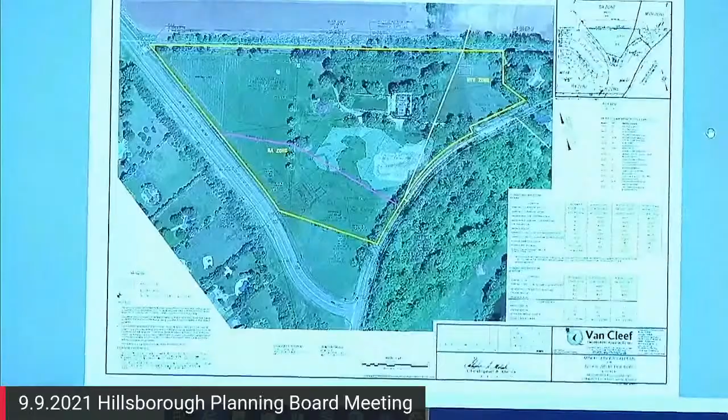Okay, sorry. So can you please briefly describe the project for the board before we get into all the reports? Yes, it's as introduced: a minor subdivision to create one new buildable lot in the remaining lands with the existing dwelling and other structures. This is at the intersection of Amsterdam Drive and Millstone River Road. I'm sure you may know it well, as I know it as the vineyard on Amsterdam and the beautiful white house on Millstone River Road.

Okay, so let's start talking about the variance requested for the project, and we can look at the planning memorandum dated August 16th, '21. Yes, and for the benefit of the board members and the public, on the video is the color rendering posted on the township website. It's a colorized version of the minor subdivision. The entire tract, which is 12.5 acres, is outlined in yellow, and in cyan is the proposed lot line, which would create the 2.5 acre buildable lot on the southern portion of the tract, and the remaining lands with the existing dwelling and other structures to the north. We're going to mark this A1. This is the minor subdivision plan, last revised July 14th, 2021.

With regards to the relief requested this evening, the application complies in all regards with the exception of the lot width for the proposed lot, which is the portion that fronts on Millstone River Road. With these types of lots that have frontage on two roads, they're commonly referred to as through lots.

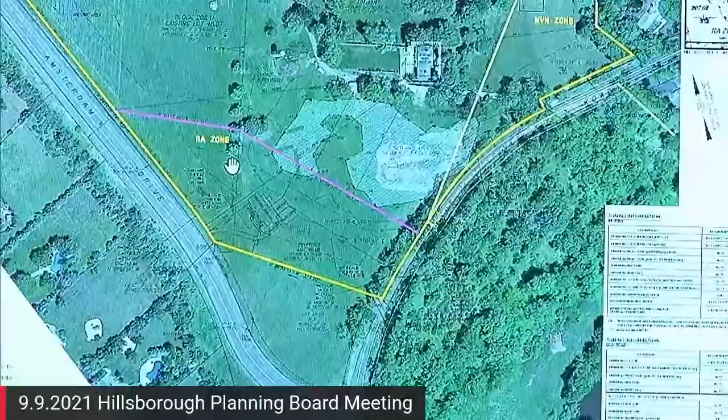The tree I'm referring to, this is likely not natural or native, it was planted. There's a row of trees along the edge of the grape vineyard and fence, and there's one tree in this location. We don't want to touch any of them, but to the extent we may need to for grading and drainage around the new dwelling, there'd be one tree. We've actually discussed this with the applicant. Okay, thank you.

You're welcome. Can I ask a follow-up question? So is the construction and development in the foraging area for the bald eagle? I think the foraging area they're referring to is really the rivers, the Millstone River and the Raritan River. Because I do have experience that if this does fall within that foraging area, there are restrictions on when you can disturb the area while they're nesting, a period from January to August. So it should just be looked into.

So is what Mr. Ford said all right with you then? Yeah, I know there's just time constraints if it's determined that it is in that foraging area. You're saying you don't know or it's not in that area? Well, we're talking about one tree that we'd be impacting. Oh, it's a tree. Yeah. And when they refer to foraging, it's my understanding they're foraging for food along the rivers. Okay, you all right with that? Yeah, okay, thanks.

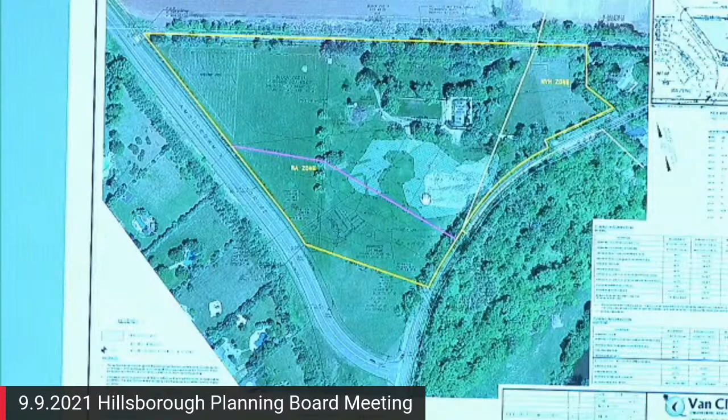Yeah, and then with regards to widening this out, widening it another 20 feet or so really wouldn't enhance the buildable area of where the house is being placed, and really just brings more restricted area. This is where the wetlands are that I'm highlighting now onto the rear of this lot. So there's really, and because that's a technical requirement for lot frontage—yes, that's true, this is our lot frontage, but this unique situation where it's a through lot, that's really our rear yard.

So what leg on that requires the variance? This leg right here, along Millstone River Road. So if you were to move that to make it conforming to 200 feet, does it then hit that other zone? And are there implications of that? I'm playing ignorant, I don't know. Yeah, I don't know that it hits that other zone. It would possibly come close to it.

Would it impact the development of the proposed lot? I'd say no, because the zoning restrictions are with regards to where the house is located. We've shown the front, rear, and building setbacks for the proposed lot on the minor subdivision plan.

So for Mr. Maskey, if it touches, are there any implications of it being in the MVH zone? Are there any additional hoops or hurdles that need to be jumped through? Generally speaking, you're better off not splitting zones, because you get into questions of two different zones. So unless there's a pressing need to cross the zone boundary, it's probably cleaner to keep it in one zone.

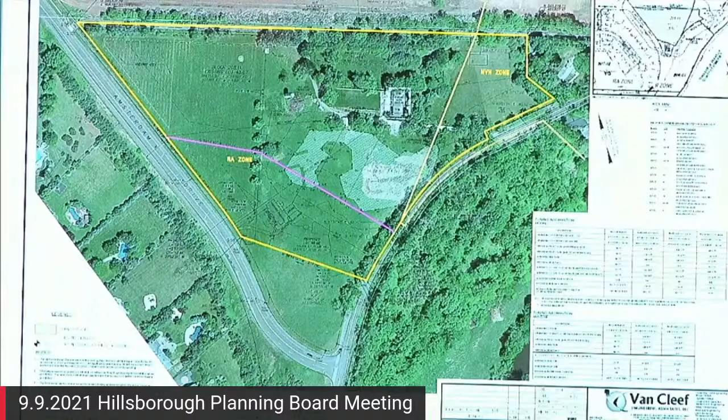Was there ever any issues with Naturally Nurturing to the north there? I remember them as an applicant one time, and there were some issues, whether cutting trees down or something, I don't fully remember. You're referring to a nearby property, not this one? It's north of it, listed as Naturally Nurturing LLC. There were some operational issues there, shall we say. I remember that, it's not on your property though. It was coming onto your property from there. Yeah, that's the old right-of-way of Hillsborough Road between the two lots.

So I have maybe a question and a couple comments. Was it an oversight that we didn't get the DEP letter dated December 7th until today, or is there a reason for that? No, normally it's not a checklist item or application item, it's something we request and then provide. It's interesting, we request it from DEP and then provide it to DEP as part of our LOI submittal. I think the Environmental Commission just requested a copy because it's documentation that DEP issues and requests.

And then my last question, the only variance in this whole application is for lot 48.08, for the 171 versus 200 feet. That's it, that's correct. Okay, thank you. Any additional questions or comments from the dais?

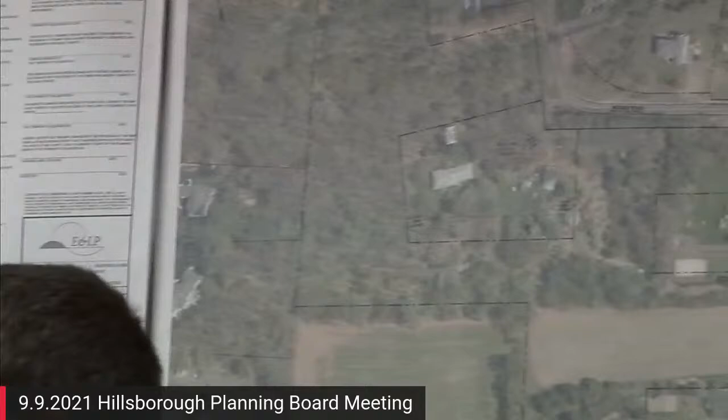So in an effort to clean up title here, to put buildings on the lots they belong on, to make things more conforming — that's why we're here before you tonight for this minor subdivision.

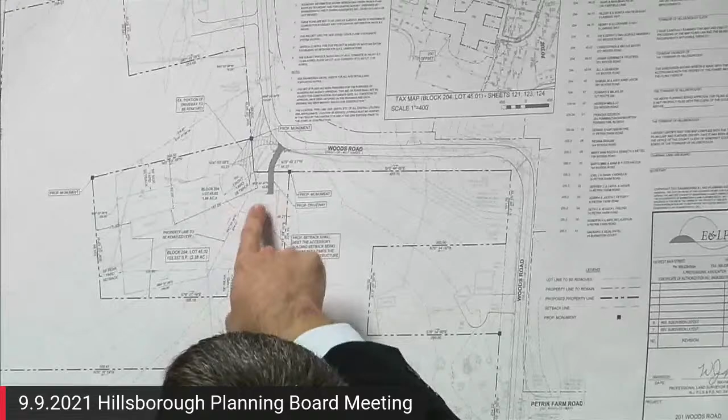The resultant is that lot 45.01 will be a 12.28 acre lot, as opposed to the 12.99 acres it was previously. Lot 45.02 becomes a 2.38 acre lot, so it becomes larger. The nonconformities surrounding the residence, namely the rear yard, go away. The rear line is now set 75 feet off of that, so that becomes conforming. The driveway gets reoriented, removing some impervious coverage, where right now it has this forked entrance.

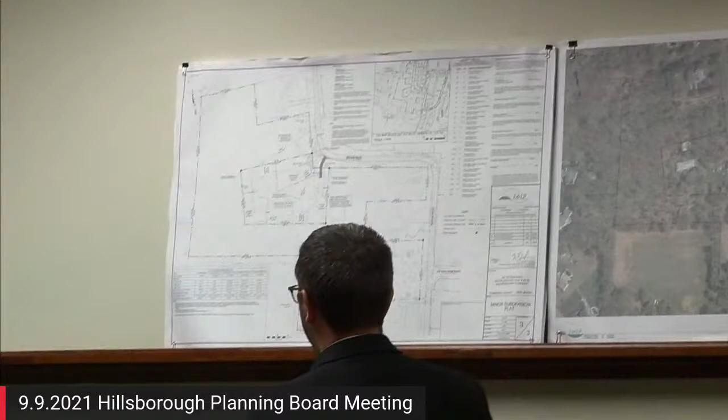That said, despite the fact that this lot has gotten significantly larger, part of what happened is the improvements that weren't on the property came onto the property. So the impervious coverage, while reduced both physically by the relocation of the driveway and percentage-wise, still exceeds the ordinance requirement of 10%, at 15.41%. So variance relief is requested for that exceedance of impervious coverage.

Again, this is all longstanding existing impervious coverage that has not created any issues as a result of its placement there, and otherwise is functional. I think it's in many ways a result of the distance the house is back from the street. The house is set back significantly from the road. It's not close up to the setback line, so the driveway ends up being much longer.

Again, you have the garage, which was constructed many years ago and is not located proximate to the house, and therefore we have some additional driveway because of that. The other piece of relief associated with this application is that accessory buildings are required to be in the rear yard, and clearly the garage is not.

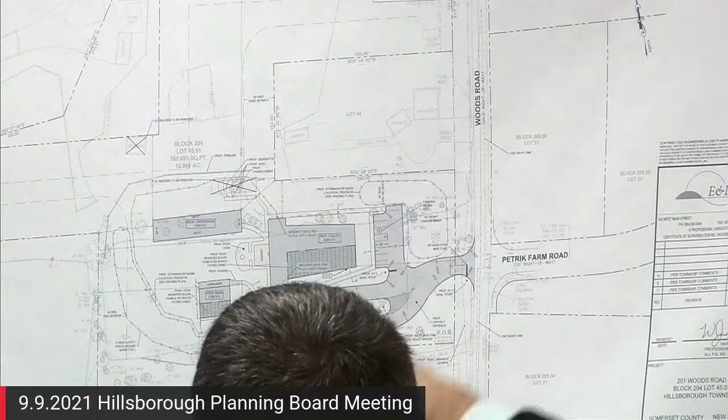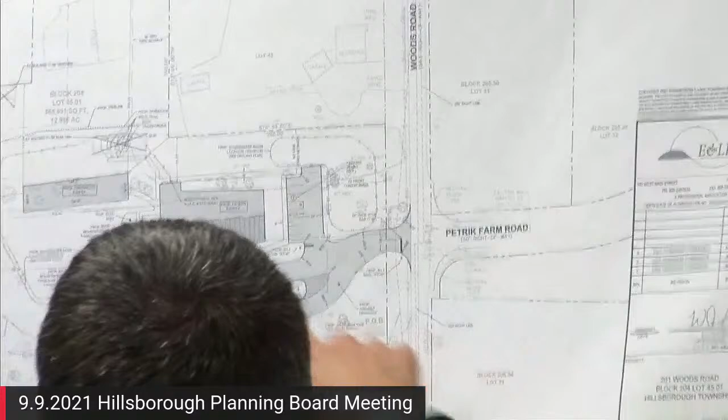The driveway comes in at 24 feet wide. To the north, there is an 8-space parking lot, which again also has a 24-foot aisle. It then continues as a one-way in this loop around the front or side of the building at 20 feet in width, which then becomes 24 feet in width where these 4 parking stalls are located to the west. As it comes back around the loop on its way out, the overall width of pavement there is 20 feet and the traveled way is 12 feet because there are 5 parallel parking stalls in there, kind of overflow spaces in case they're needed, that are 8 by 22.

The remaining stalls are 9 by 18. Those stalls comply with the RSIS requirement, but not your code. Your ordinances require a 10 by 20 space. Your ordinance requires a 30-foot aisle for your two-way traffic and a 25-foot aisle for the one-way traffic.

This is not a shopping center. This is not a busy doctor's office. This is a very low traffic generator. It has permanent residents with some staff that are there to attend to them. But it is not something where cars are constantly coming and going through the day. And really the need to have these oversized aisles, we don't really feel it's necessary. It's additional impervious pavement that gets installed that has to be managed from a stormwater perspective without the real benefit to it.

24-foot aisle for the parking spaces or the two-way drive aisle is fairly standard and common width. The 20-foot width on the north side of the loop really is in excess of what is typical. But what it does allow is that if somebody's dropping somebody off, they can park along there and another vehicle can still pass next to it. 20 feet is still wide enough for two-way traffic.

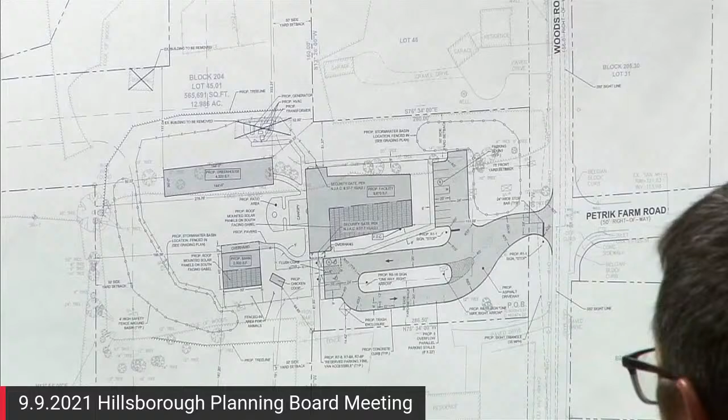And then as you come around, that 12-foot aisle width is fairly typical for a one-way aisle when you have parallel parking next to it. In my opinion, if you went to a 25-foot aisle on a one-way, that's a fairly typical width for an aisle when it comes to two-way traffic. And I think you invite people a little bit to think that two-way traffic is permitted in there when you don't otherwise want them to be doing that.

So from a practical perspective of what this use is, from the demand of the use, from the function of it, I think the waiver request to go from 30 feet down to 24 feet for the two-way aisles, and from 25 feet for the one-way down to 12 and 20, is reasonable as well. We had depicted in the documents that fire trucks can make turning movements and get in and out of the site without issue, so there's not a need to have that additional pavement on the site.

The second part of that is the parking stall dimensions. Again, 10 by 20 is required, where we have 9 by 18 and 8 by 22 for the parallel stalls. Now, 9 by 18 is again RSIS standard that this meets. This is a residential facility, and we believe is very appropriate.

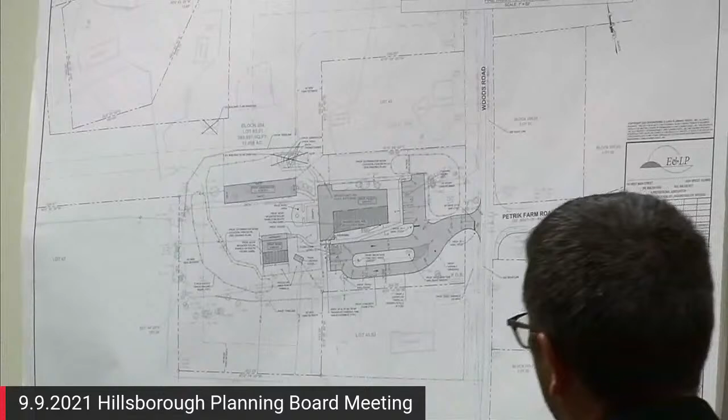This does not have a septic system, but we do have the driveway and the main building. The attendant features in the rear, and even along the edge, there is disturbance of the wooded area outside of that 40 feet. That ordinance is really geared towards your typical single-family dwelling, not a facility such as this. A lot of these features in the rear are agricultural in nature - I'm not going to explain the operations of the site, but if you do have questions, the applicant is here.

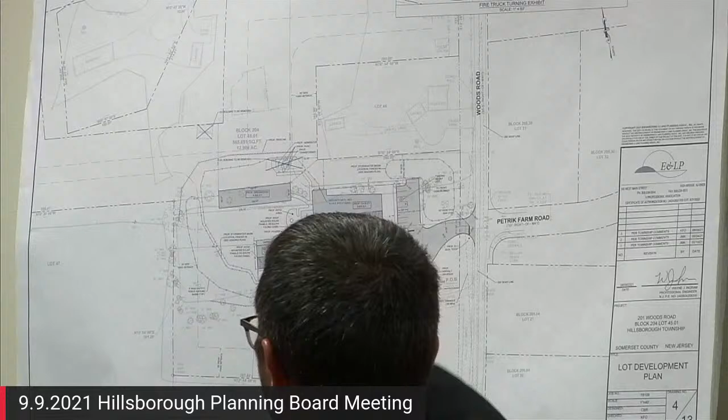As part of the programming for their facility, they engage the residents in agricultural activities. So they have a greenhouse, a barn with a chicken coop, and agricultural activities happening in this rear area, all beyond the critical zone. There's also a detention basin in the rear and another in the front - again, these areas are beyond that critical zone. I will note that the development itself was located so that it was predominantly within that existing agricultural field, to minimize disturbance to the trees.

The removal is certainly less than 20% of the wooded area on the lot, and we are providing mitigation for the tree removal, which is on sheet 6 of the plan set. Compliance is demonstrated, providing the mitigation in accordance with the ordinance requirements.

Can I ask one question, if I may, for a second? Yes, sir.

Councilor Mayor, I'm looking at this application. It looks like they're asking us to approve lot line changes right now, not site plan approvals. So are we talking about things we really need to be talking about, if we're just looking to change some lot lines and they have to come back to submit a plan?

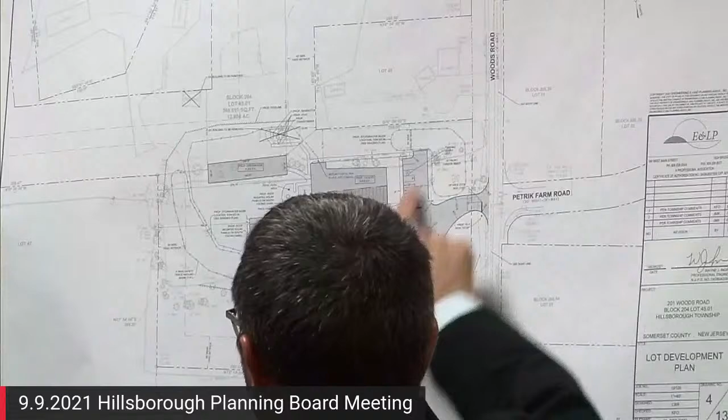Previously, in some prior iterations, we had it located in this 8-space parking lot, at the top. That actually would require a waiver because it would be an accessory structure in the front yard. I don't believe the applicant would have reservations about relocating it there if the board was willing to grant that relief. Again, it puts it in the front yard.

Nobody really likes having trash enclosures in the front yard. Generally speaking, it's located beyond the 75-foot front yard setback and on the other side of the detention basin. That would be an option. Or we could do our best to slide it around the circle a little bit, get it from slightly under 14 and a half feet to maybe 16 feet or so.

Yeah, I don't think I had the front yard in mind when I made that recommendation, because it looks like you can just put it up against the other residence and not really resolve anything. Yeah, we're just kind of horse trading it around a little bit. So, Dave, what was your vision here?

A condition of approval could be that they explore other options for placing the trash enclosure to increase the distance from the residential property, to the satisfaction of myself and Mr. DeSessa. And if I may, to the chairman's point, if we located it here, the residence is fairly close. In this case, the residence is towards the front of the property here to the east, closer to Woods Road, and this is located almost in the back corner of their property.

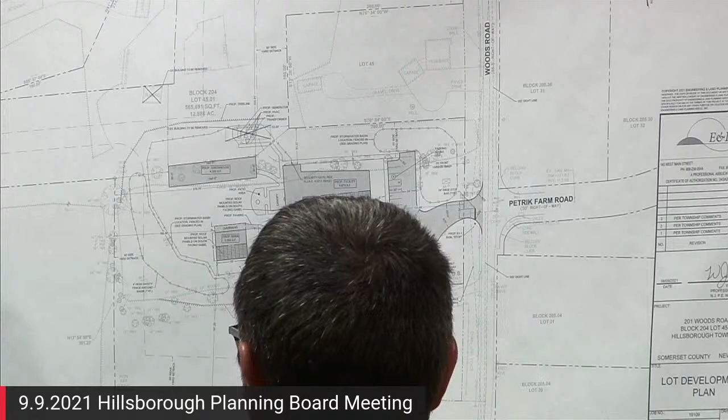Yeah, absolutely. So there are 12 parking spaces that are traditional head-in parking spaces. There are 8 located to the east of the building between Woods Road and the facility, and those would be 9 by 20. The spaces located right by the entrance, which include 2 handicap stalls, those 4 spaces, are also 9 by 20 stalls. The 8 by 22 stalls are the 5 overflow parallel parking stalls located on the loop, on the south side closest to lot 45.03, providing some additional parking.

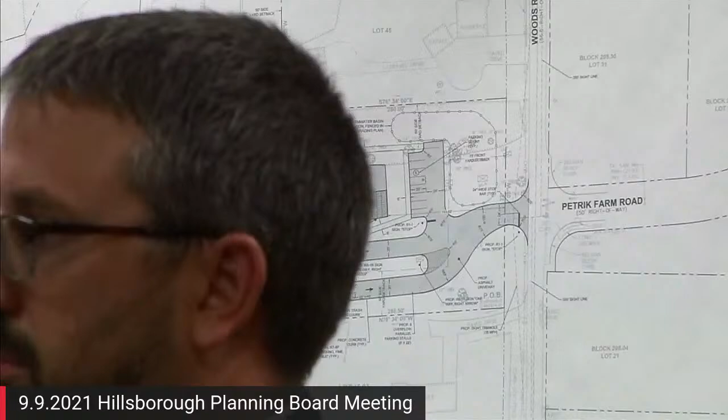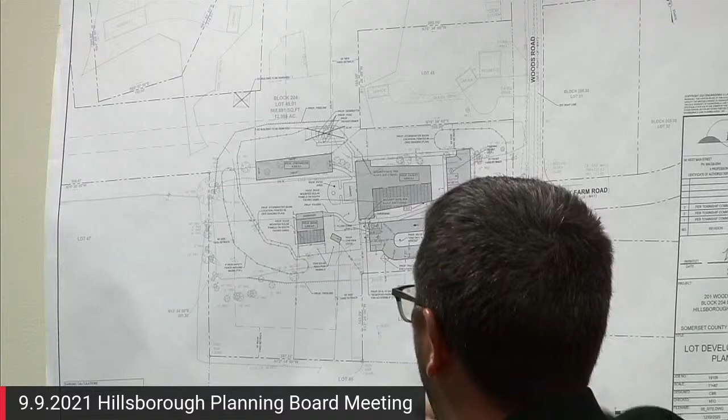If you go back to the discussion we had about parking, a maximum of 5 employees, and the requirement of 1 space per 3 beds, that gives us a total demand of 10 parking spaces. Outside of the 2 accessible stalls, we have 10 parking spaces. So we have sufficient parking even without the overflow stalls, but in the event there's a need for it, there's an opportunity for additional parking in that area. Those overflow spaces are only 8 feet wide, as opposed to 9 or 10 — the 8 by 22s.

Continuing to page 4 — maybe we should have gone through all the memos before asking questions of the applicant. When it comes to office space within the facility, there is going to be some administrative space, but it's not going to be manned in the sense of an office use. Similar to any extended care facility, parking demand is calculated per bed and per employee. Any such facility will have office space just to keep records and maintain that information, so there's no additional parking demand beyond the 5 employees on the site.

I think the remaining comments here, as far as these additional items, we can address realistically. They're part of the lot development review that the township will do, because again this really isn't a site plan. So we can provide those details into the plan, including the additional detail on grading and utilities — we can certainly provide that as well.

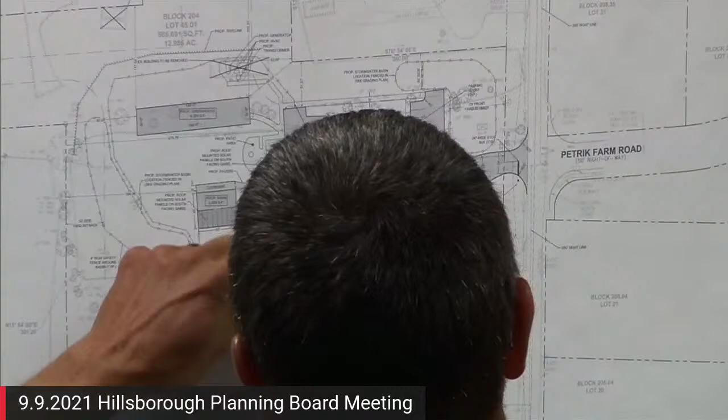If you look here, you're all the way in the rear of the property. It looks like there's a garden in the back here, and this is the one I see they have trees, but if you're coming through here, the lights are... Yeah, as you come here, there's some distance, but as I said, we can certainly stagger the rows and work to increase the number of plantings in there to offset that impact.

Just for a second, just for clarification for the board, the buffer is required.

The testimony you've heard is not, in my opinion, accurate in terms of when it applies. It does apply - he's reading two different sections. There's a reference from one section in the parking ordinance which requires the buffer, to another section which requires what goes in the buffer, not where it's required.

So just for clarification, you've just said you'd be willing to look at beefing up the buffer a bit. Would that be to the satisfaction of the board's landscape architect engineer? Yeah, I think that's a fair way to handle it.

You want to go to the environmental? Yeah, I just have a couple of questions. I want to refer to the Environmental Commission's report dated September 1st. I apologize, I was not at the meeting, I was on vacation, so I didn't get the gist of some of this stuff. Could you give me a synopsis of the phase one discussion, considering the groundwater contamination on the adjacent property? It doesn't seem like you're building a basement there, so I don't know if you have any vapor intrusion issues, but were you going to do a phase one, or are you concerned about some of the contamination on the adjacent property?

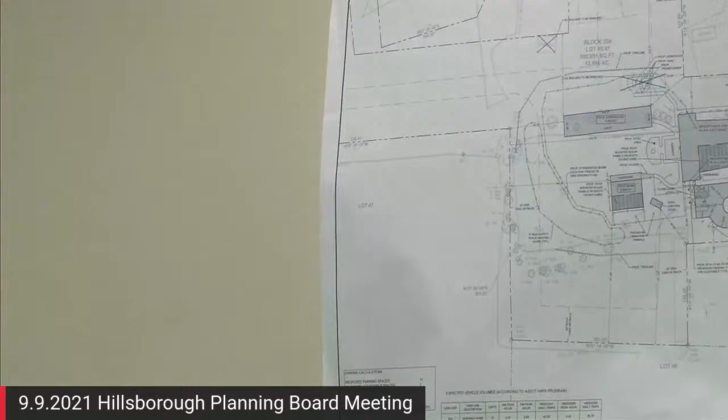Joe Kotowski, 12 Petrik Farm Road, Hillsborough. I just want to, if you could explain better the impervious, because that area where it looks like it's going to be all commercial parking and roadway, even though it's a single structure, is all farmland. So how is the impervious area not increasing greatly at this point?

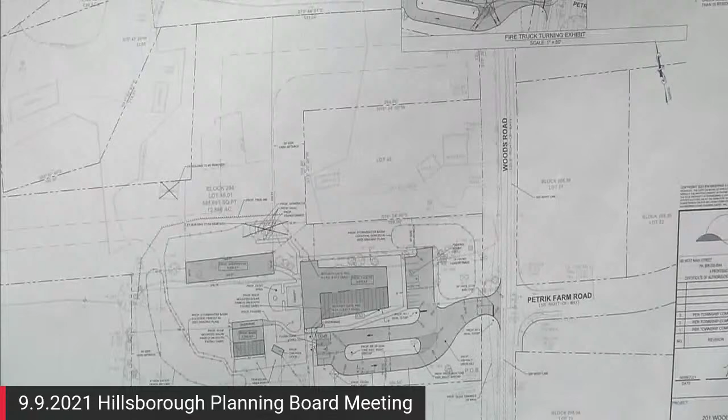So to be clear, what I was saying was we are adding impervious. And that's why we have the stormwater management plan to manage the increase in impervious. Because yes, it is currently vacant and we're adding impervious surfaces between the building itself, the drive aisles, the parking spaces, the sidewalks, all the features that are going to be constructed on the site. So it is being increased. What my comments and testimony were is that the municipal ordinance, the requirements for it would have us put in more impervious surface than what we're proposing.

It would have wider drive aisles. It would have larger parking spaces that we don't believe are necessary for this use given its intensity. So it's not that we're not adding impervious - we certainly are. It's just that the relief that we're asking for as far as the waivers is so that we can limit how much impervious we are putting in.

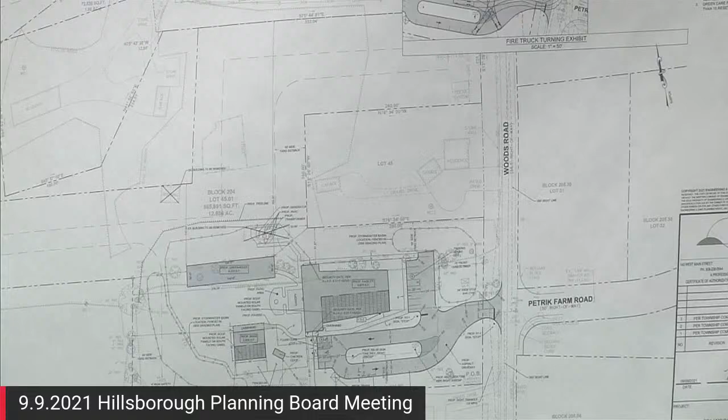So you're saying the existing is 15.5%, correct? That is lot 45.02. So that is the existing dwelling. That's the dwelling on the other side of the S turn on Woods. Yes, correct. Okay, so that dwelling is staying? That dwelling is staying.

Okay, so then all this area where the stretch of farmland is where you're gonna put all your development, is adding how much to that 15%? I don't see anywhere in here where the total impervious is for the whole site, even though they're two separate lots. Well, for the project, what's the total impervious? So the compliance is per lot because the standard is per lot.

Right. So the lot that has the house on it requires relief from the 10% standard because that is going to be in its proposed state at 15.41%. So that's existing as is, that's the 15.41%. The proposed lot has a coverage of 9.52%. So it complies with the 10%. Right.

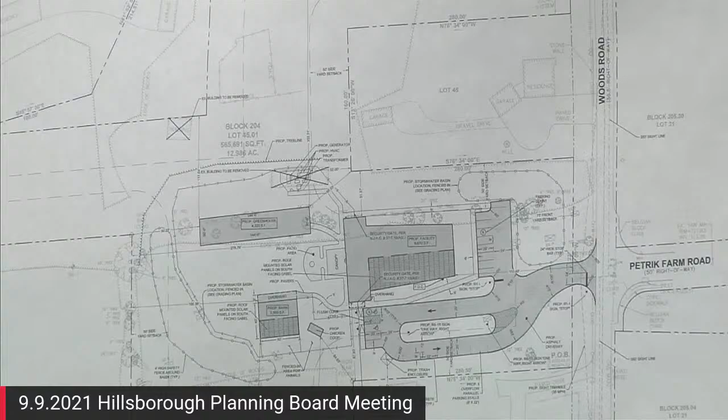I mean, I'm not an engineer, but just looking at it with the roadways, the building and everything, it would be way more than that single family home. You got to add all of that whole existing property, not just the part that you see - I think we have to add the whole lot. So this area here has no impervious right now? Correct. And you're gonna put 9% in here? No, the 9% is on this lot, which is this entire property.

The 9% is this section. No, it's the whole footprint. The way it's calculated is the total surface area of impervious that is going to be placed, divided by the overall lot area. So it's not done section by section.

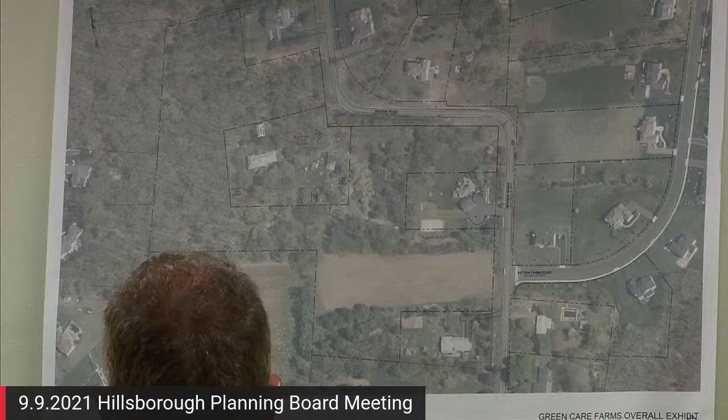Right, so that's the whole 16 acres. It's 9% of the whole. It's 12.3, so out of that 12 and change acres, it's less than 10%. Yes, it is concentrated in this location, but it does comply with the ordinance.

But Chris, you might want to clarify. Overall, the development is increasing the impervious by an acre of new impervious. That acre of new impervious is what's being treated by their stormwater management facilities. There are two basins that will collect that extra runoff, hold it in there, and release it at a slower rate, and that's how it's designed.

So there is an additional acre of impervious being added to the site. Correct. You deal with percentages, and because it's a large lot area, the percentages are less. Right, but the actual area is being increased, and that's why they have a stormwater management system.